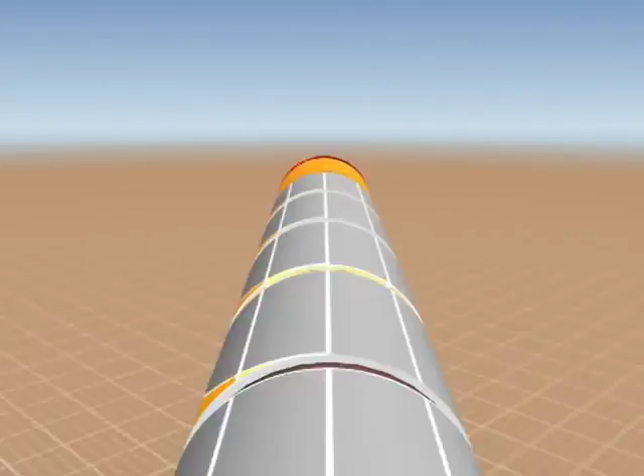CoJack, a unique simulation program for safer, more economical and more transparent jackings.

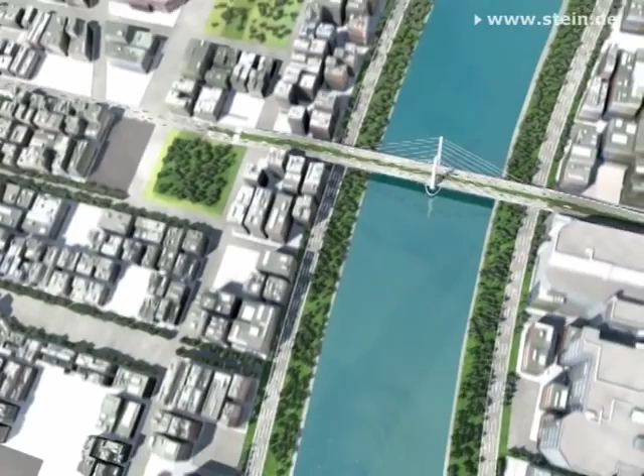Nowadays, the new construction of supply and discharge lines in densely populated urban living space is only manageable by using trenchless technologies. Especially for larger cross-sections, usually pipe jacking is used. From a technical point of view, it's a challenging construction technique which demands a great deal of the engineers, especially when it comes to the structural dimensioning of the pipeline.

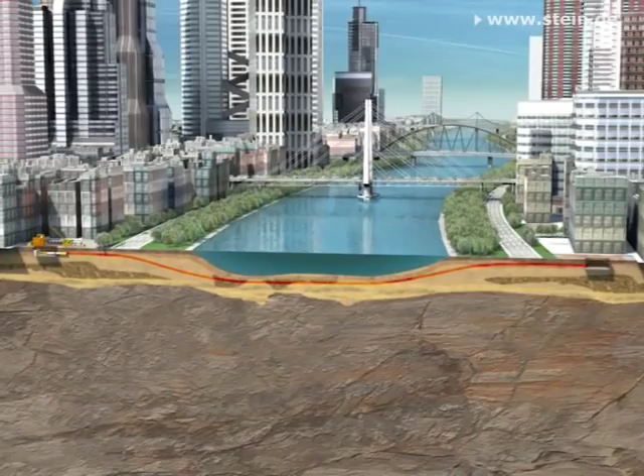When using this method, a jacking station starting from a starting shaft drives jacking pipes through the subsoil towards a target shaft. Here, the configuration and the application of machine technology decisively influence the strain of the jacking pipes. The main jacking station installed inside the starting shaft introduces the forces necessary for jacking into the pipe string. The jacking station is supported by an abutment inside the starting shaft.

Especially over larger jacking stretches, intermediate jacking stations are used in addition. They segment the pipe string and thus limit the longitudinal forces acting on the jacking pipes.

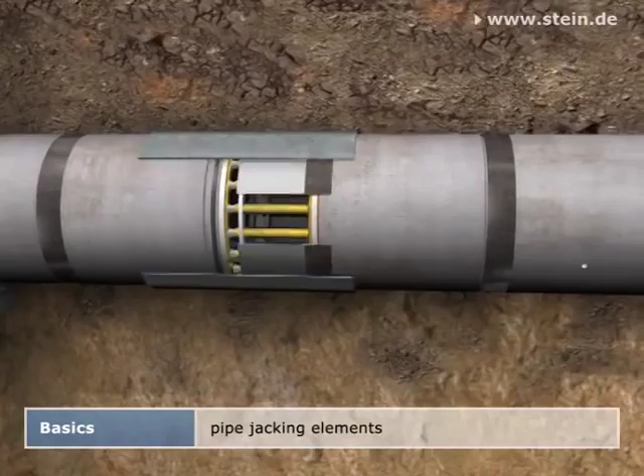The annular space between the jacking pipe and the subsoil, which is specifically created by the overcut of the jacking machine, is filled with a support and lubrication fluid. It supports the subsoil and lubricates the pipe string, thus reducing the necessary jacking forces.

A steerable shield machine added to the front of the first pipe enables the jacking. Depending on the geological and hydrogeological preconditions, it's equipped with corresponding excavation tools for removing the soil at the working face.

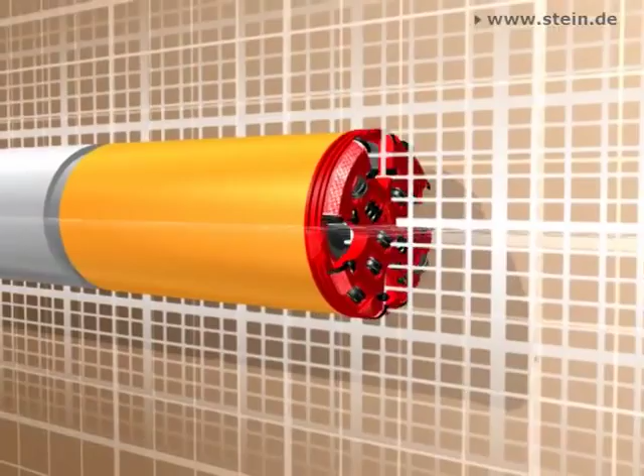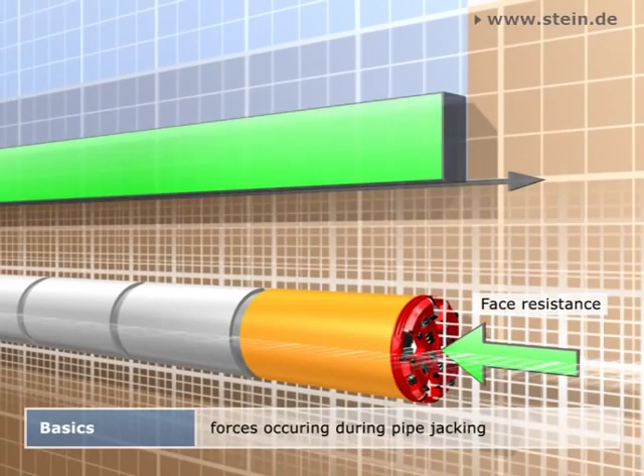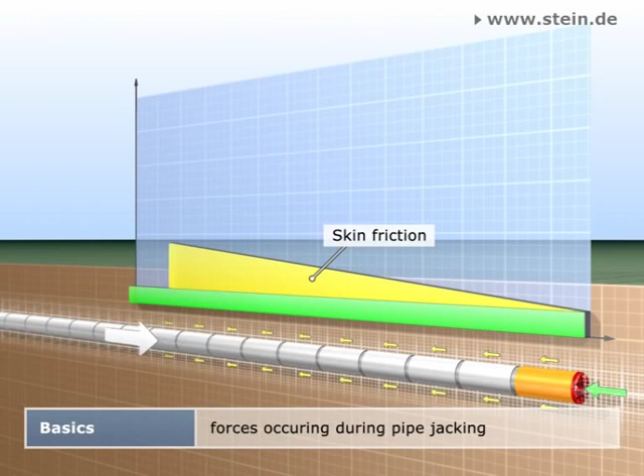In the following, the impacts on the jacking pipes during jacking will be explained. The green arrow symbolizes the face resistance, creating a constant longitudinal force inside the pipe string. The jacking resistance, here marked yellow, is far more important. It's caused by the skin friction between the pipe and the subsoil and generates a continuously growing longitudinal force.

Inevitably, longitudinal forces have to be added due to scheduled curved jackings and unavoidable steering movements. Too frequent or too strong steering movements can lead to an enormous growth of the longitudinal force and to impermissible pipe strain.

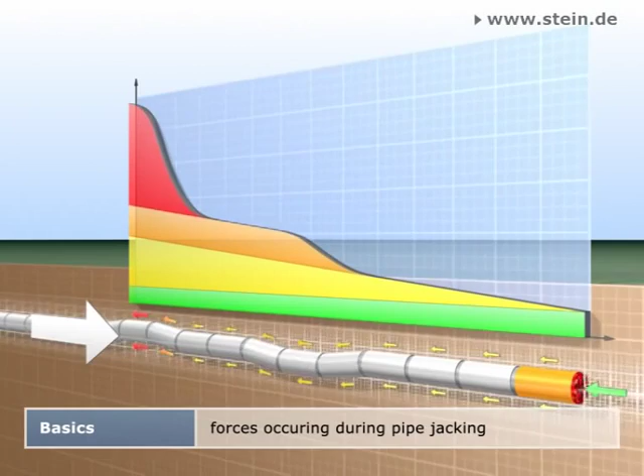To limit the longitudinal force inside the pipe string to the permissible value, intermediate jacking stations are installed. They reduce the number of pipes that have to be pushed by each jacking station.

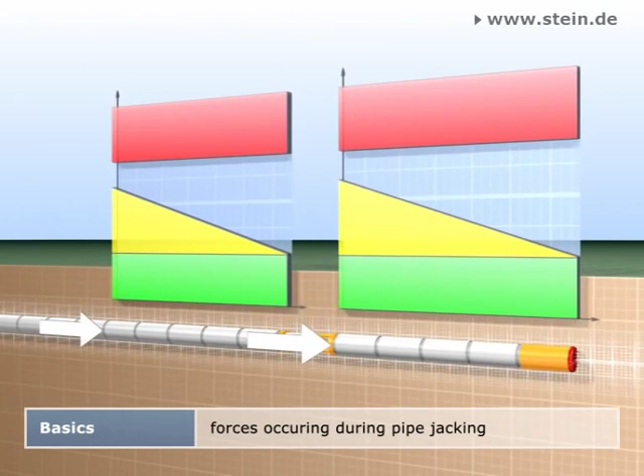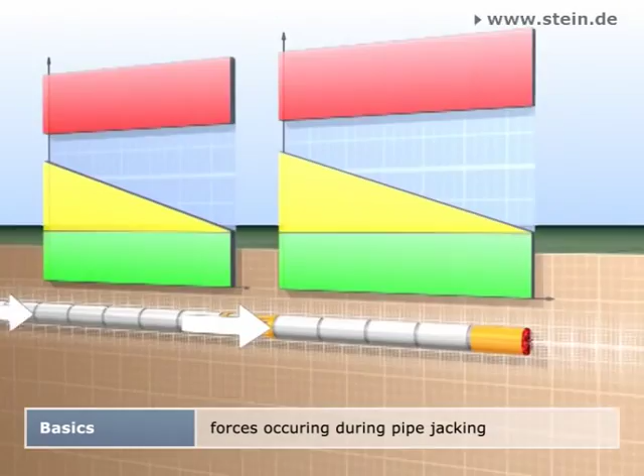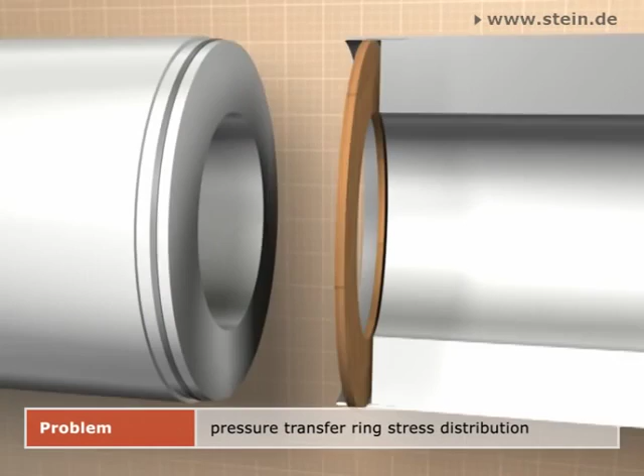The pipe joints do not only transmit the longitudinal force from pipe to pipe, they also serve as a joint to allow steering and flexibility in curves. For this purpose, pressure transfer rings are used. They're either made of softwood or chipboard and arranged between the pipe faces.

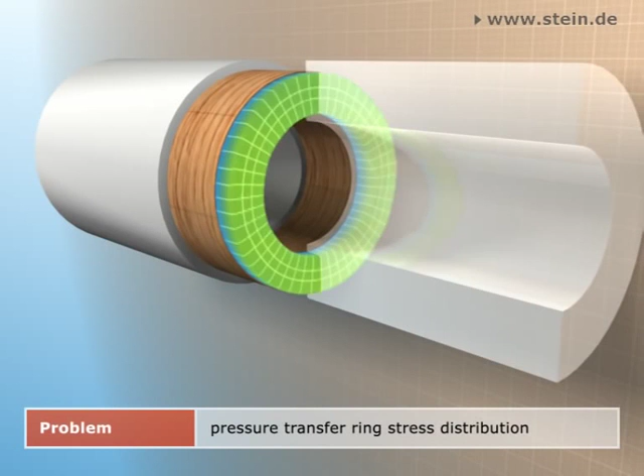Their task is to distribute the longitudinal forces as evenly as possible to the end face of the pipe in order to minimize the pipe strain. Here, however, the wood is loaded so heavily that it's not only subject to elastic deformation, but also to plastic and thus constant deformations. The pressure transfer ring becomes thinner.

Due to the load changes and the steering movements during jacking, the pressure transfer ring steadily loses its load distributing effect. It hardens.

This particularly influences the stress distribution in angular deflections of the pipe joints. So the force transmitting area decreases at the pipe ends and results in a gaping joint. The result is an increased pipe strain, in which the maximum stress occurs at the outside of the pipe.

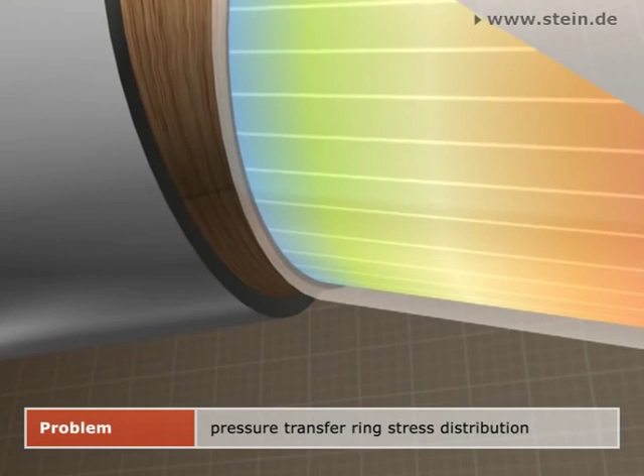This is why, if overstrained, first damages in the form of cracks or even spalling occur exactly at this point. Usually, these damages cannot be noticed when accessing the pipe string.

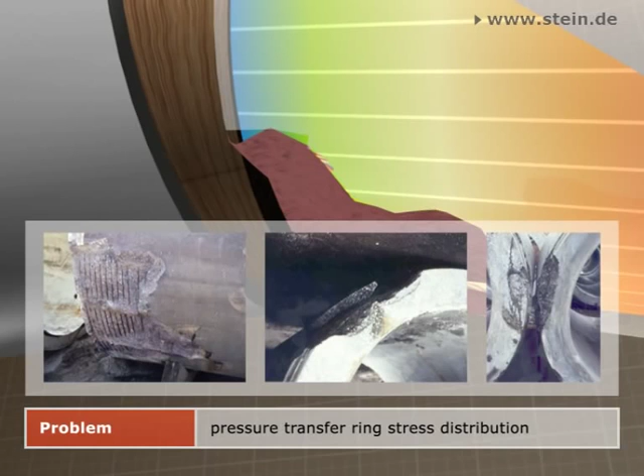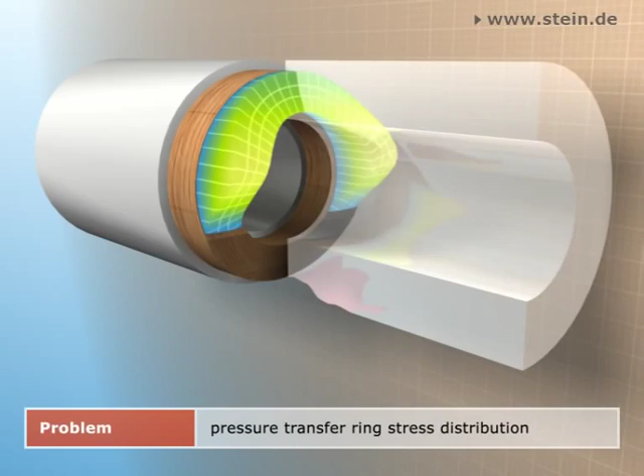Conventional calculation methods do not include the hardening of the pressure transfer ring during jacking, so there's a constant risk of hidden pipe damages.

The calculation program CoJack offers safe implementation planning, realization and supervision of the pipe jacking. CoJack considers the load history and with it the corresponding present state of the pressure transfer ring at any point in time of the jacking and in any pipe joint.

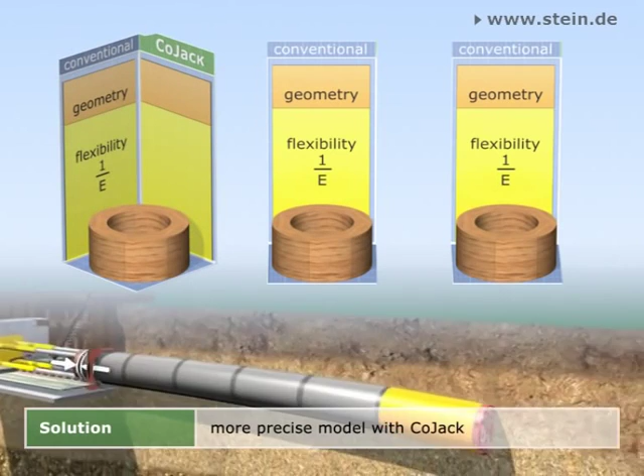The resulting nonlinear changes of geometry and stiffness are continuously included in the calculation.

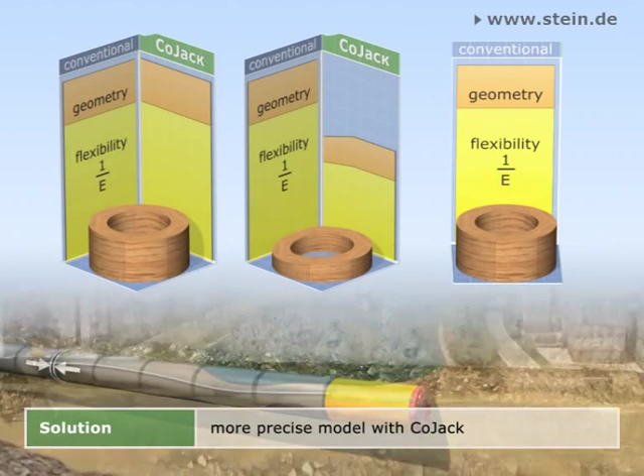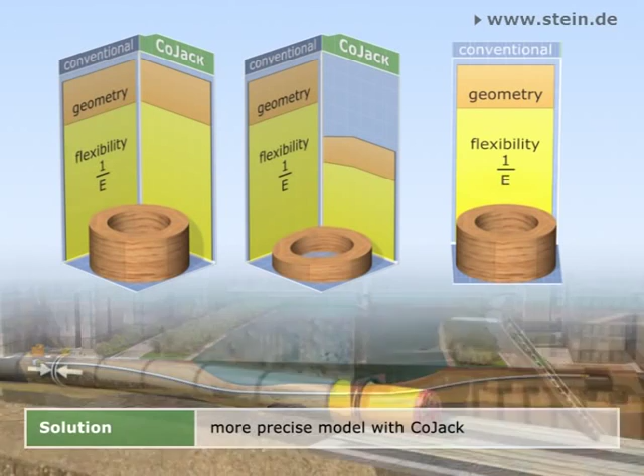The three condition stages pictured here clarify the heavy influence of the constantly changing stresses on the pressure transfer ring's thickness and flexibility.

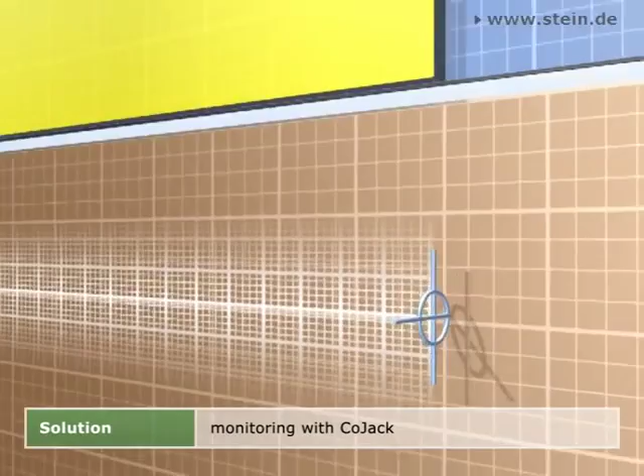Already in the planning stage, CoJack simulates the upcoming jacking measure by taking into account the planning requirements. In this way, it allows safe and economical dimensioning.

After the start of the jacking, the planning data is bit by bit replaced by the measuring data recorded at the construction site.

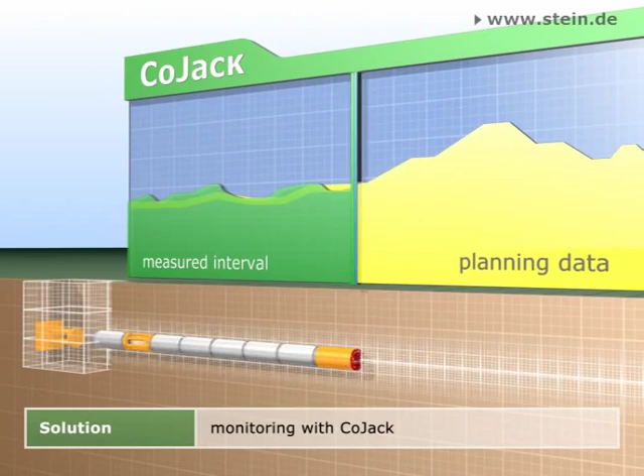Special sensor technology acquires the jacking forces at the main jacking station and at the intermediate jacking stations.

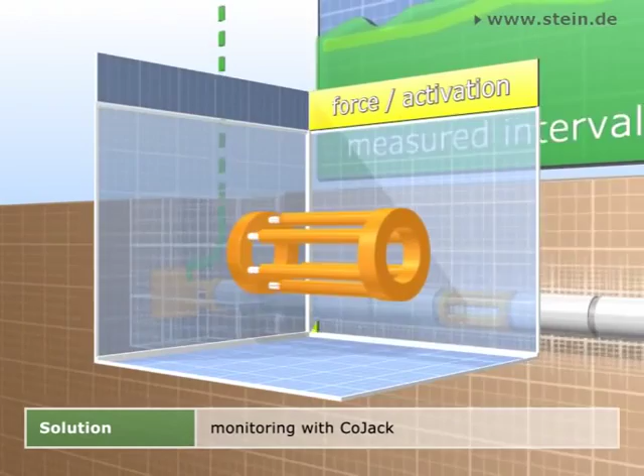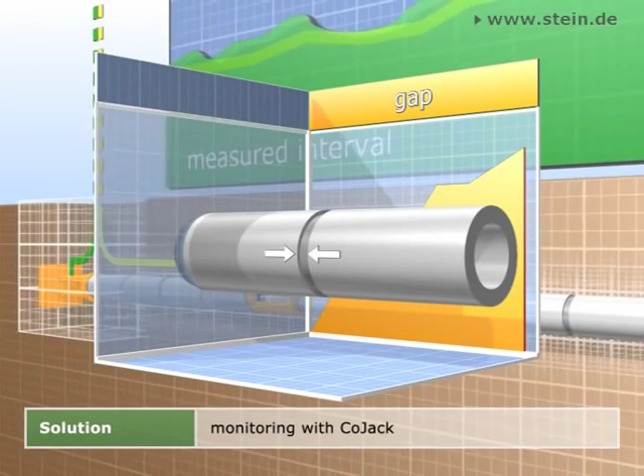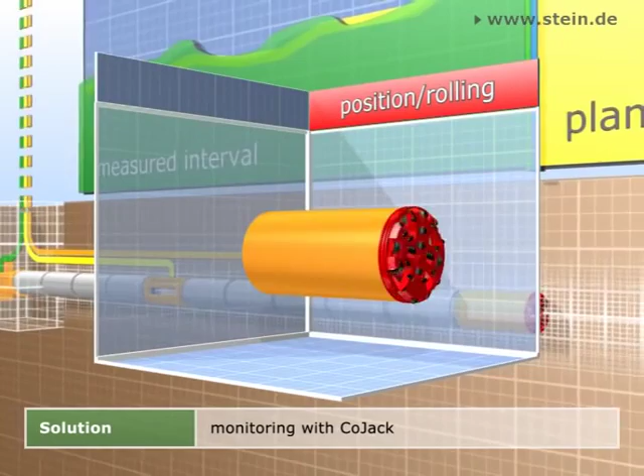Precise precision encoders are installed at 3 points at selected pipe joints. They continuously measure the width of the joint gap in order to determine spatial deflections. For a plausibility check, steering movements of the jacking machine are registered in addition.

All data is graphically processed at the construction site and is transmitted to CoJack.

For the already covered jacking distance, CoJack provides the maximum pipe strain that has occurred so far and determines the safety level that's been achieved.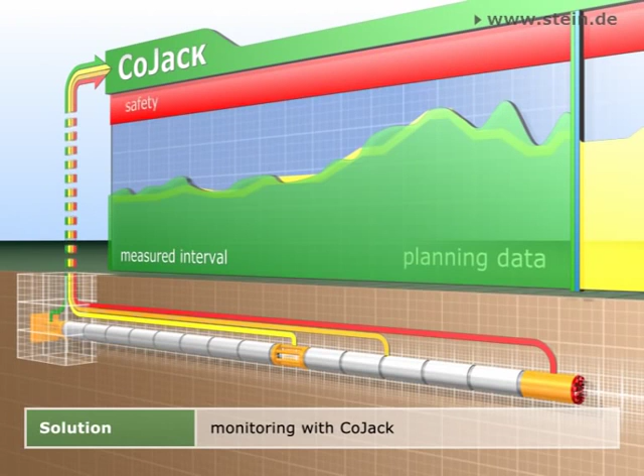For the remaining distance to be covered, a constantly improving prediction is set up based on the latest data. It refers to the pipe strains that are to be expected.

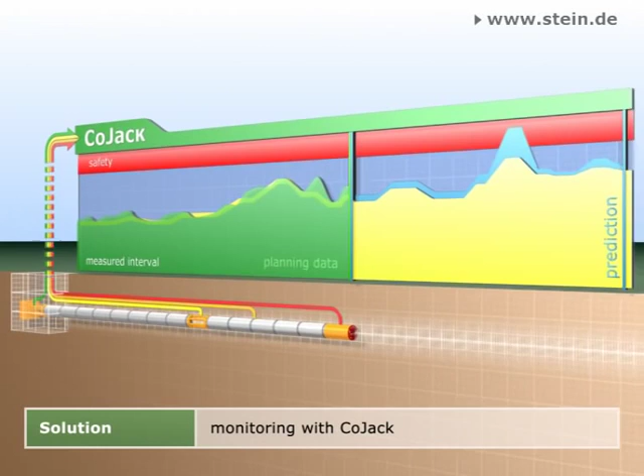For the first time, future risks can be noticed in time, for example, overstraining of a certain pipe as a result of a steering error at a certain point.

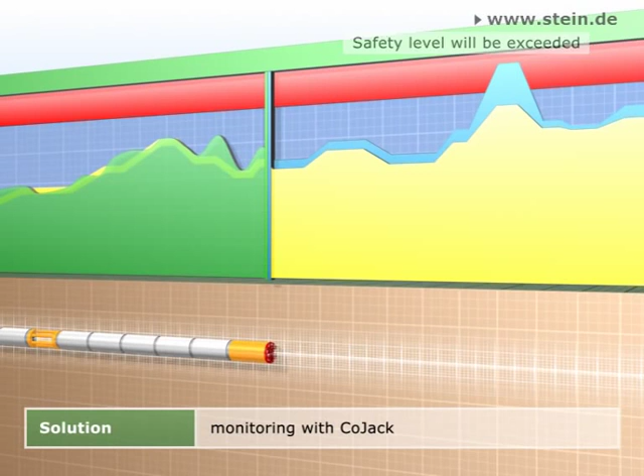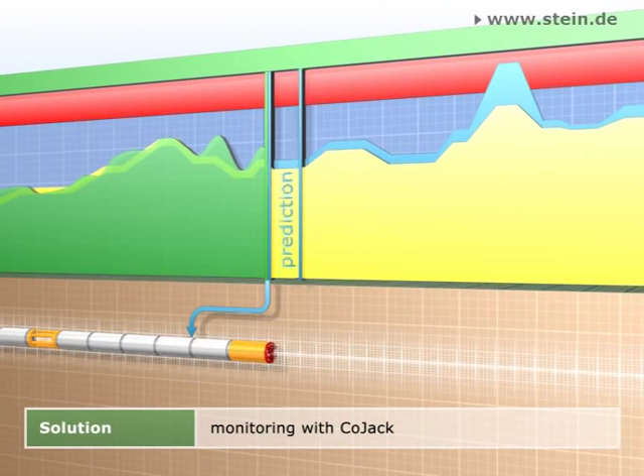In this case, CoJack offers various methods of resolution for preventing damage and checks their effectiveness. The so-determined optimal method of resolution, here the activation of an intermediate jacking station from a certain position onward, is...

instantly implemented on-site and in correspondence with the construction site. At the same time, it's recorded in CoJack. In this way, despite the problems that have occurred, the jacking can be continued without risk.

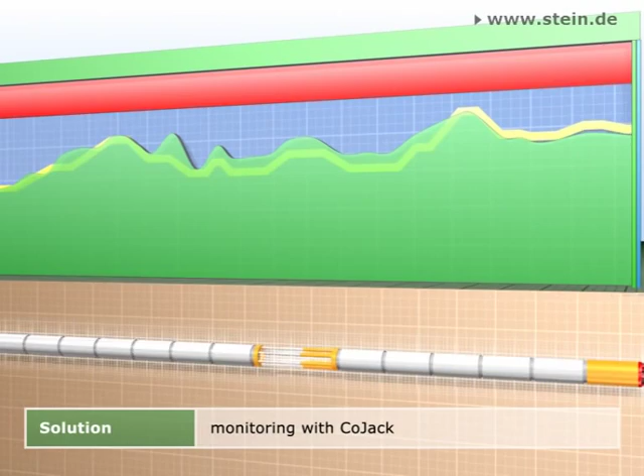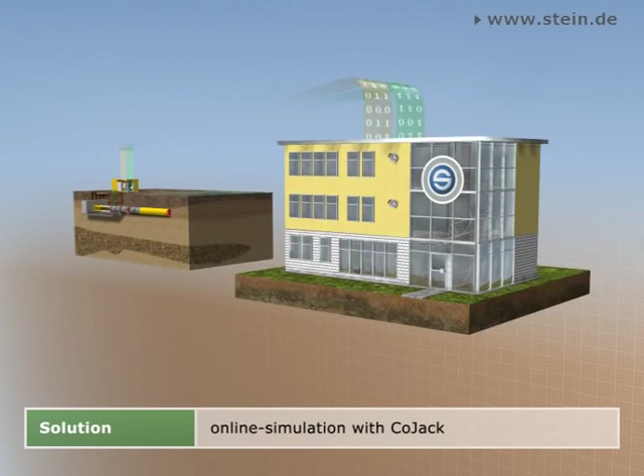Data can be exchanged via the World Wide Web or mobile telephone communication between the construction site and CoJack, so a structural supervision of the jacking measure is given continuously and independently from the location.

CoJack is a comprehensive instrument that assures the quality of jacking measures. It supports planners, the jacking contractor and the constructor.

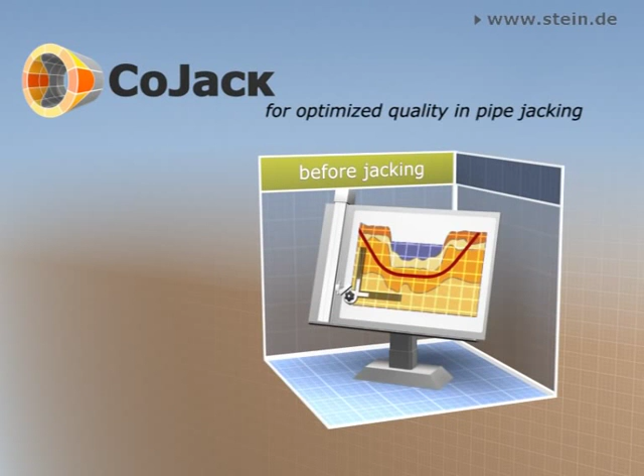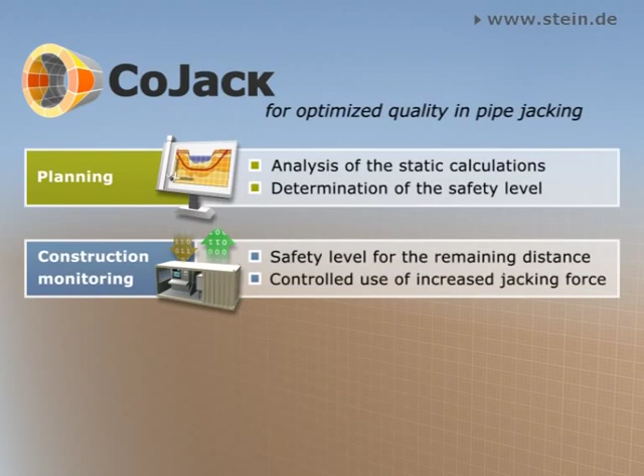For implementation planning, CoJack allows an optimal dimensioning of the pipes and a configuration of the jacking. During construction, CoJack prevents the development of damages and allows a flawless construction process. Regarding the construction approval, CoJack gives a reliable basis for assessing the stability and usability of the construction.